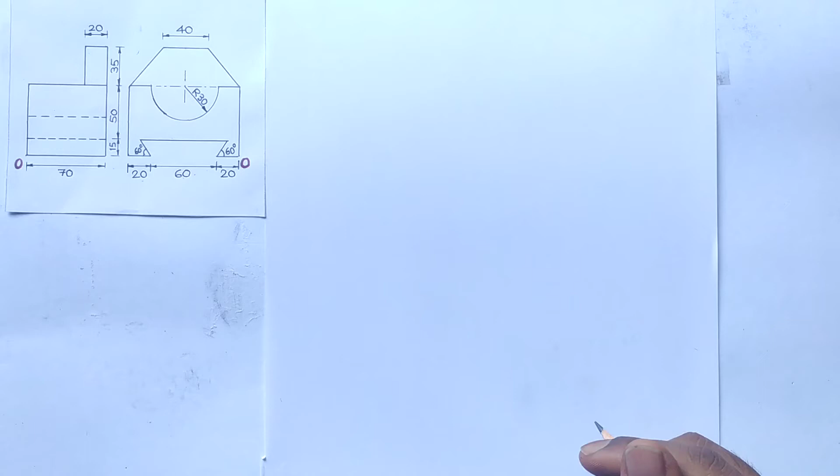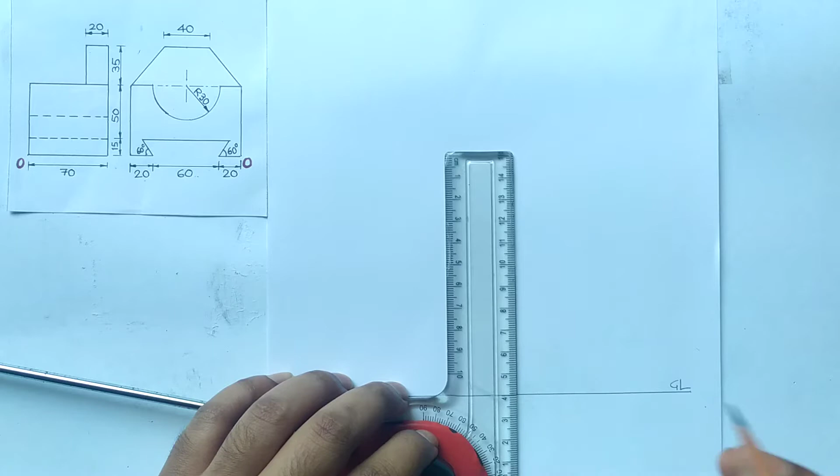To draw isometric for this component, let's draw here the origin line or the ground line. Mark a single point O, draw one vertical line, right, 30-degree incline.

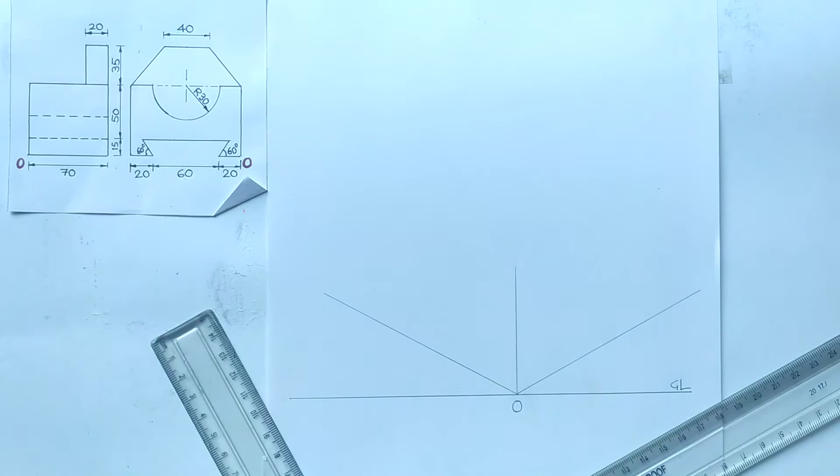These are the reference lines, right? So we will start from these lines only. Okay, these are the reference lines. Now if you observe here it is the location O, right? So that means on the left side, this should be the left side, and this should be, here it is the location O, so this should be the right side.

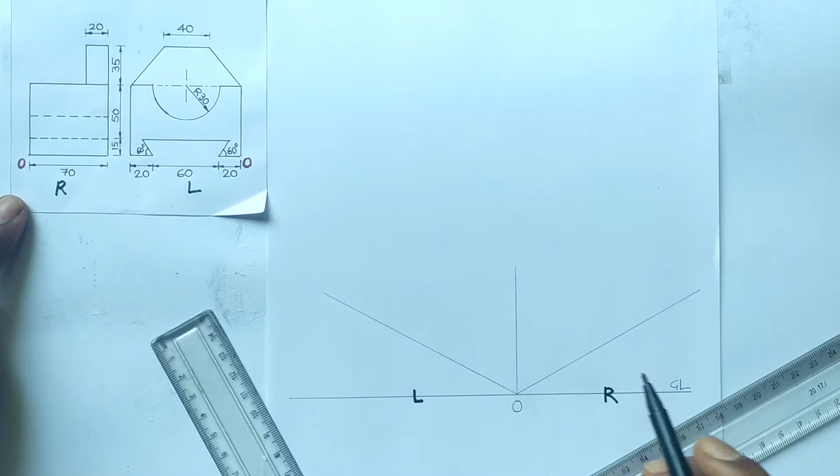So on right side we have to take 70 mm, and on left side we have to take 60 plus 20 plus 20 means 100 mm. So if you observe here, these are the two edges which are only visible, right? So we will draw these two edges only.

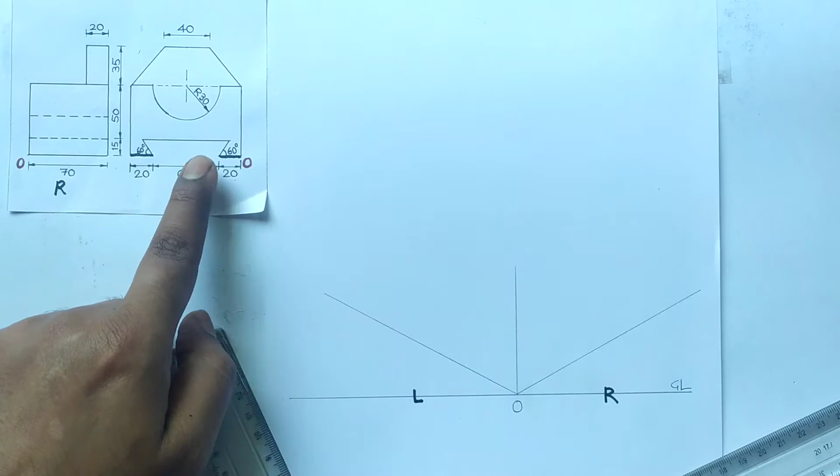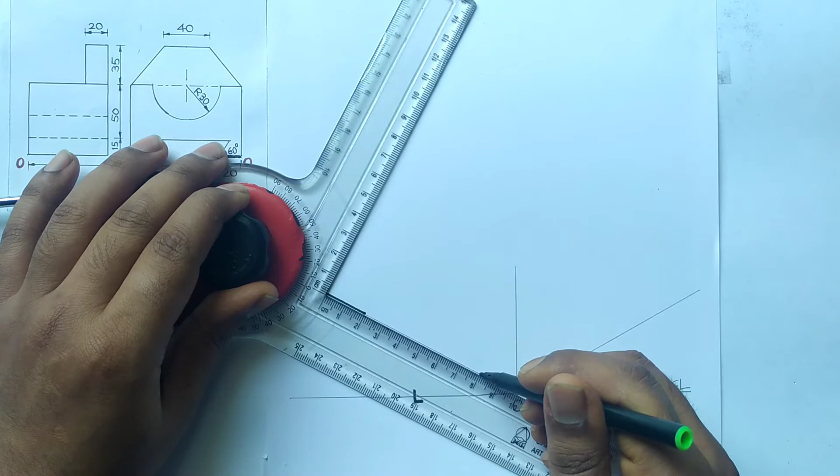See here, 60 mm on the left side. Out of this 100 mm, only 20 mm which is visible, okay, these two edges. Now we will form this slot afterwards. Initially we will draw all these things.

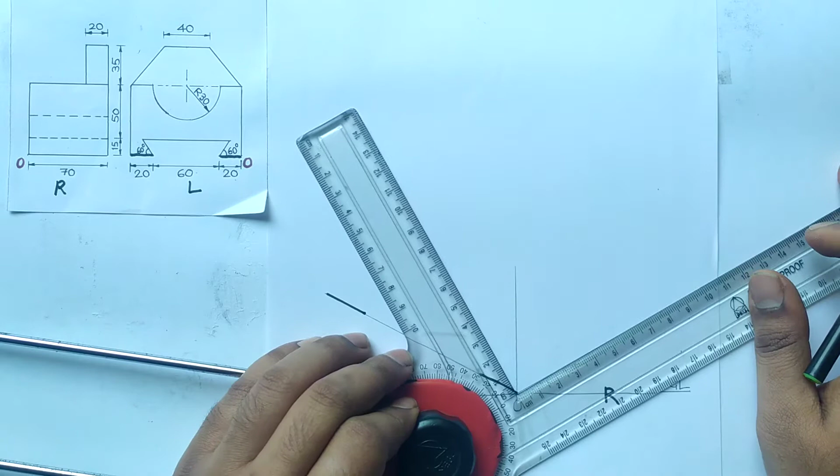Now see here, from O the right hand side is of 70 mm. So draw 70 mm from this point. 70, 100. Now see, vertically it is of, this vertical edge is of 50 plus 15, that means 65.

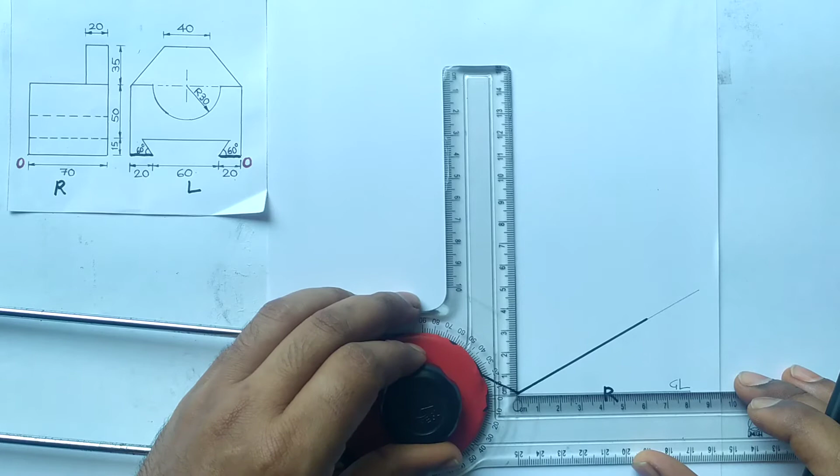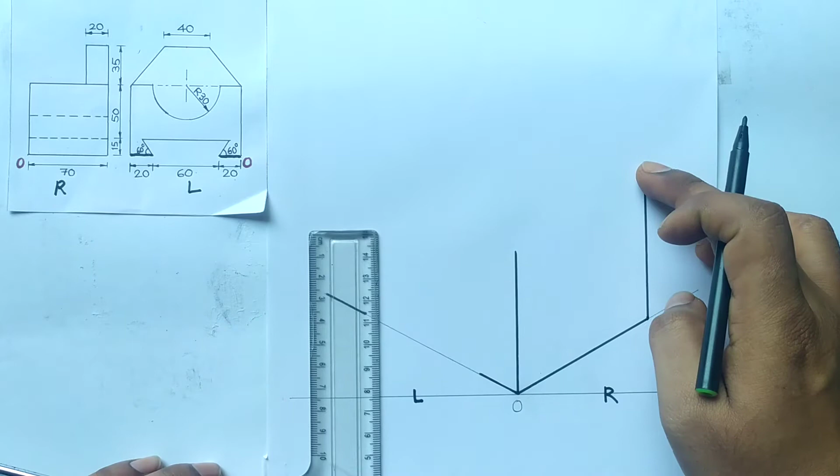Okay, so draw here 65 mm, right, this much 65. Okay, so I will draw these lines from this corner also, 65. Okay, now at this corner also 65. These are the three edges which are of 65 mm length.

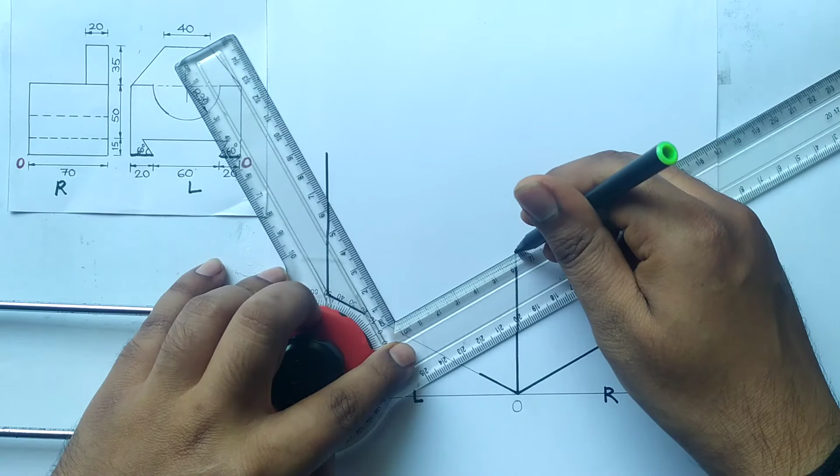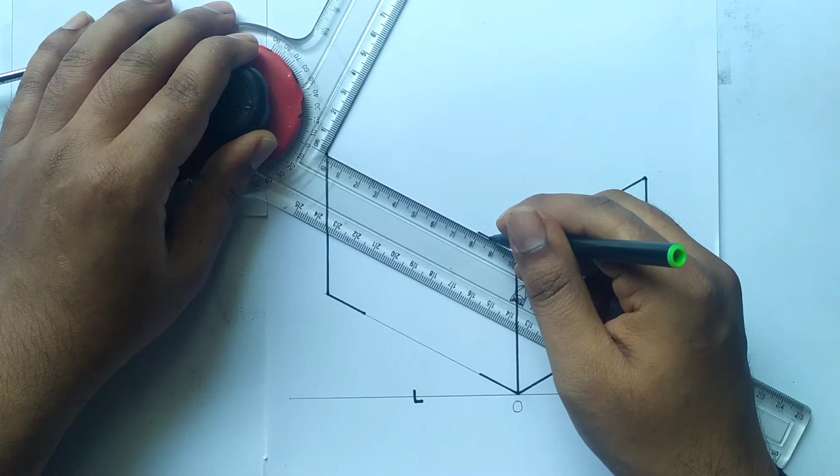Now I will align the drafter to the right side and simply connect this. While connecting this line, left hand side line, since the radius is of 30 mm, that means this portion is of 60 mm. So by leaving 60 mm centrally, I will connect only the end parts which is of 20 mm. That much portion is there.

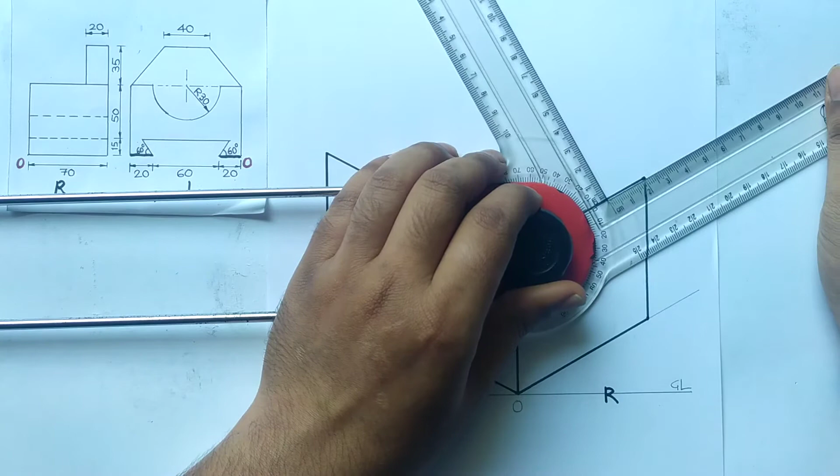Now as we know, this distance is of 35 and width is of 20. Since this line is parallel to R, I will take here 20 mm distance. Here it is. This much distance is of 20 mm, right? So what we have to do, we need to align drafter to the left side.

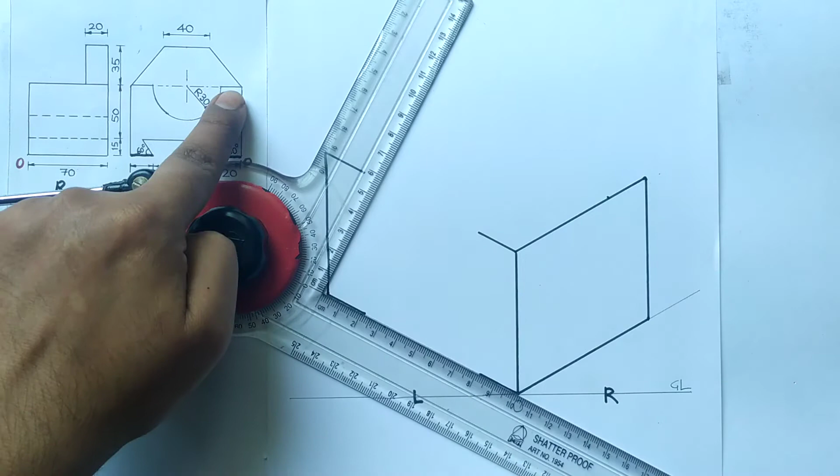And now this total distance is of 100 mm, this is of 40, that means remaining is of 60. Now 60 we need to divide equally on both the sides, that means I need to draw this line, right, this.

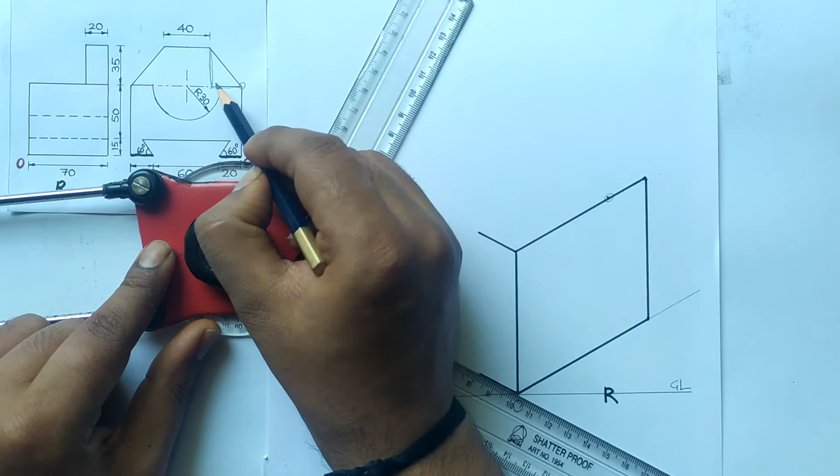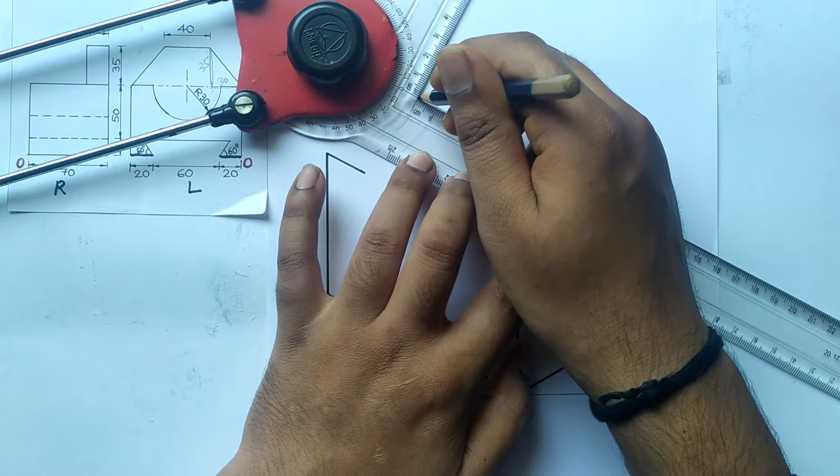Since I got this point over here, this much distance is of 30 mm and vertical distance is of 35, right? So I will draw it over here. Total distance is of 100 mm, out of which 30 mm, and here it is 30 mm, right? I have drawn two lines of 30 mm.

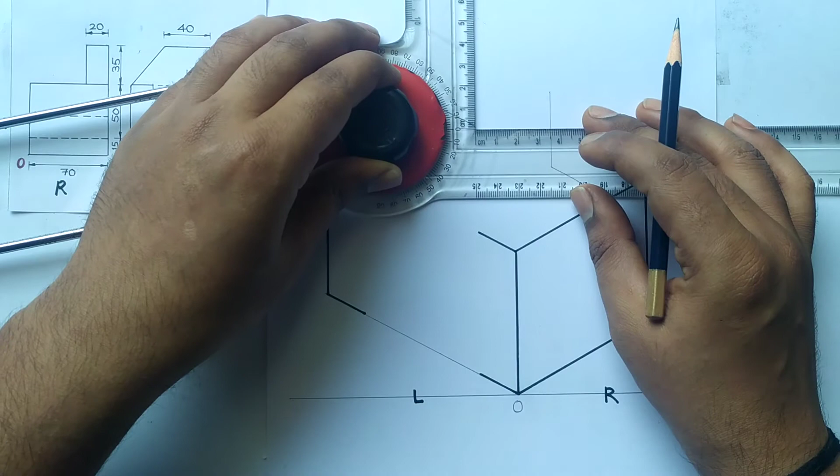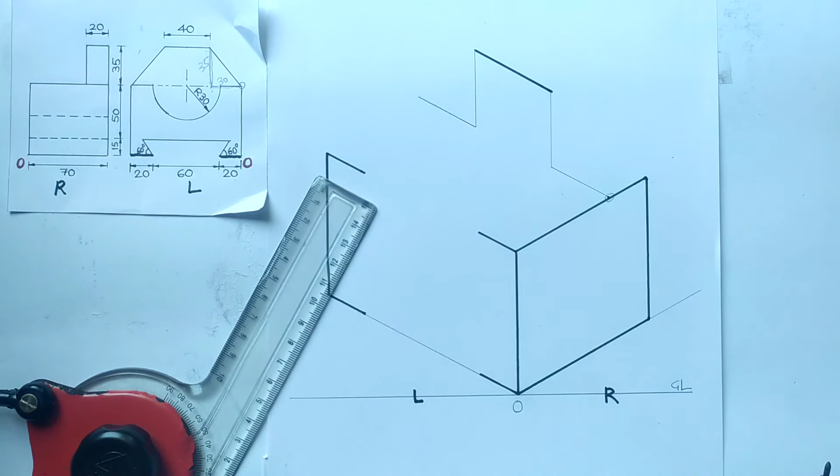Now vertically 35 mm. So align drafter in this way and take the vertical distance 35 mm. Okay, now if I connect this, it should be an edge. Which edge? This edge, 40 mm edge. This should be a 40 mm edge, which I have to connect to this point, and this point.

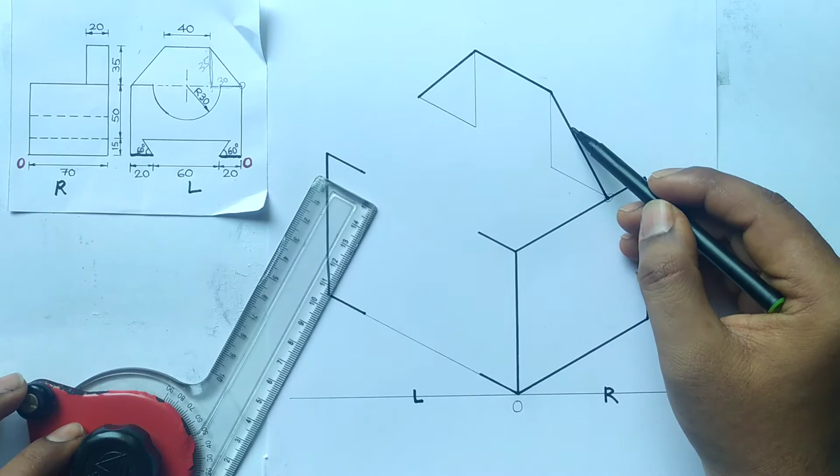Right? This is the foremost, means the first edge. Now similarly I have to generate these two lines which are parallel to this and this from these points, right? So for that, align drafter in this way.

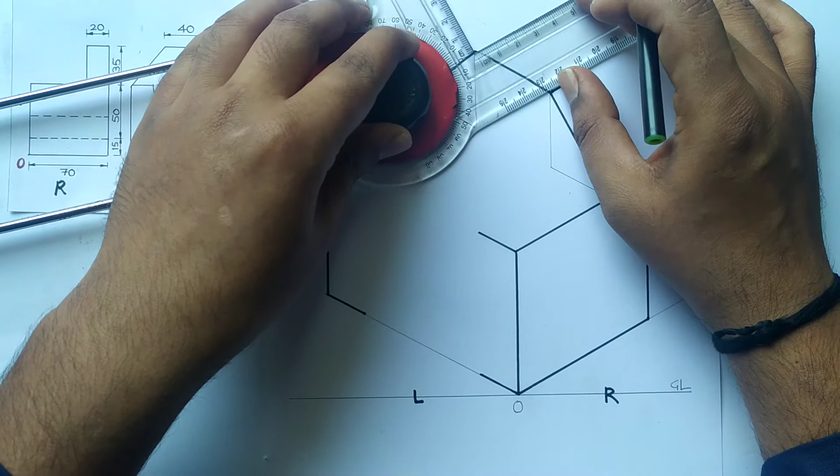To the right side. Since the width I know, which is 20 mm, I will draw 20 mm from these corners. Now it is easy to connect. Right? This much portion is there.

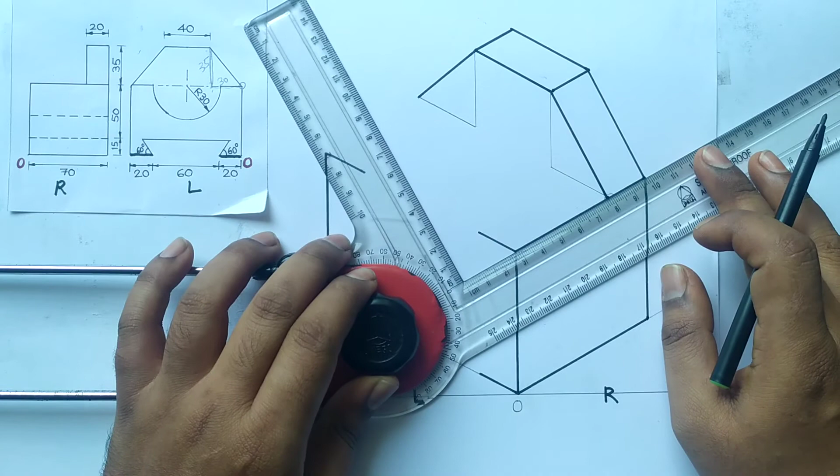Now, since here there will be a curve, right? So to draw this curve, I need to form here the edges, right? So at the same time, we will finish up to this edge.

Right? After drawing this edge can be visible.

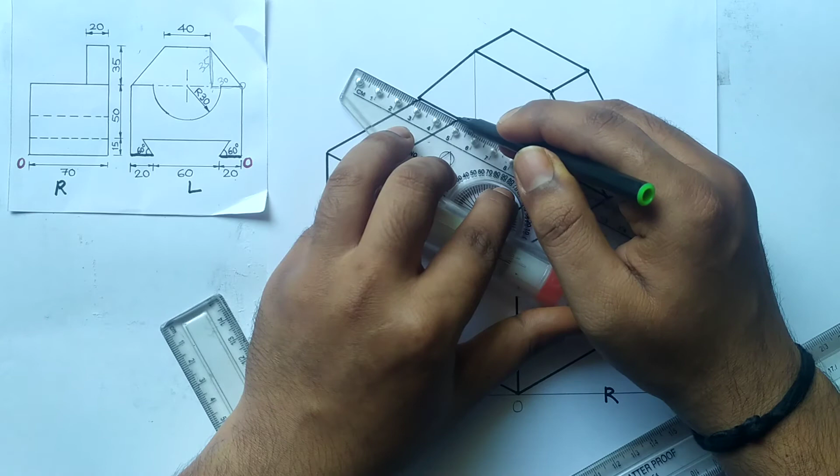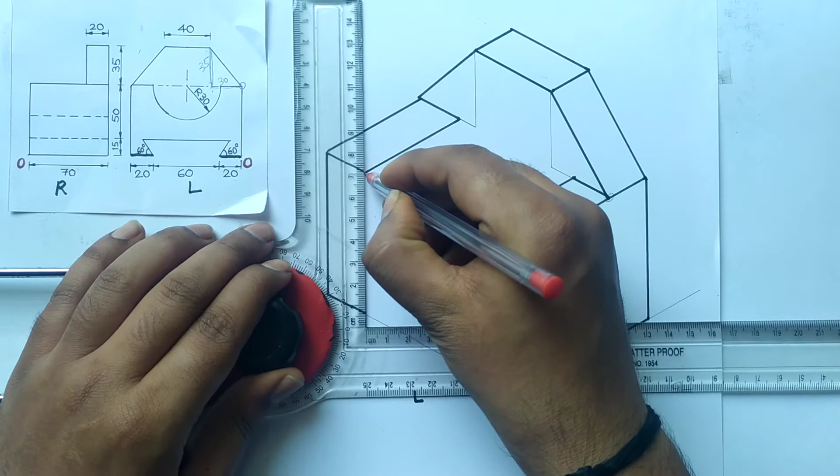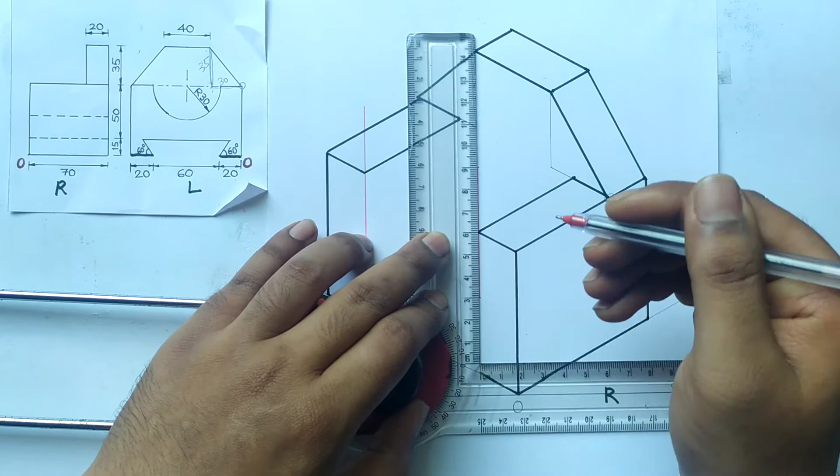Now I need to generate here a half circle, and for that we will form a square. Since I know, I will align drafter initially vertically. From this point I have to take 30 mm distance on both sides, because radius is of 30 mm. So 30 mm on both sides. The same way over here, 30 mm on both the side.

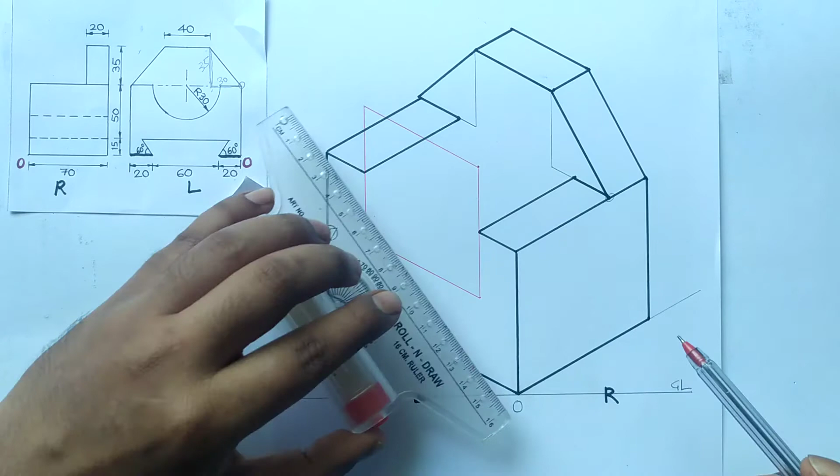Connect it. Now this will be the square by which we will get the inside half circle. So for that, connect the longest diagonal. This is the longest diagonal. Now from this point connect to this one, right? From this point connect to this one, or from this point connect to center point.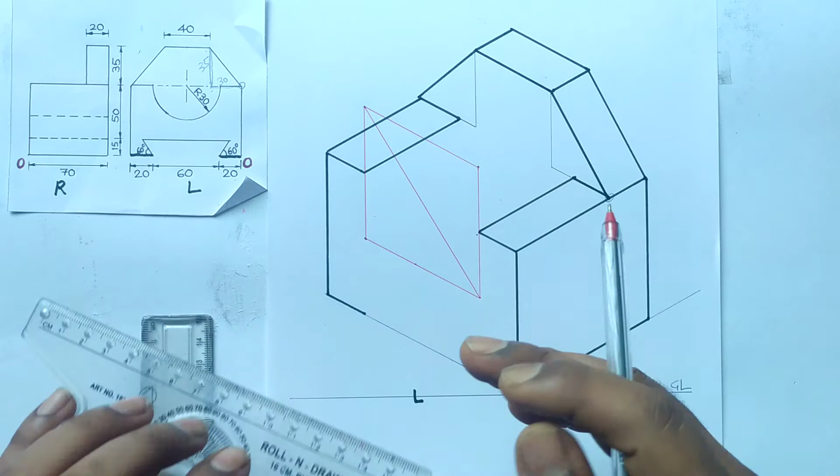See carefully. From this corner I have connected to the center point. This is the center point. From this point I need to connect to this center point. Right? Now,

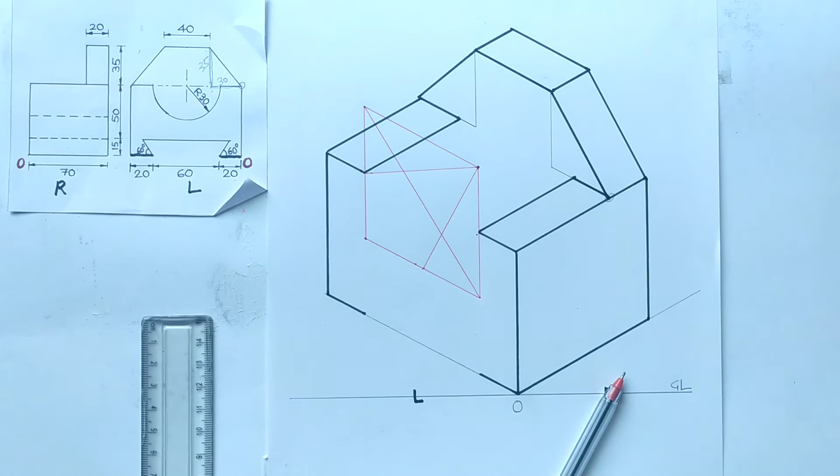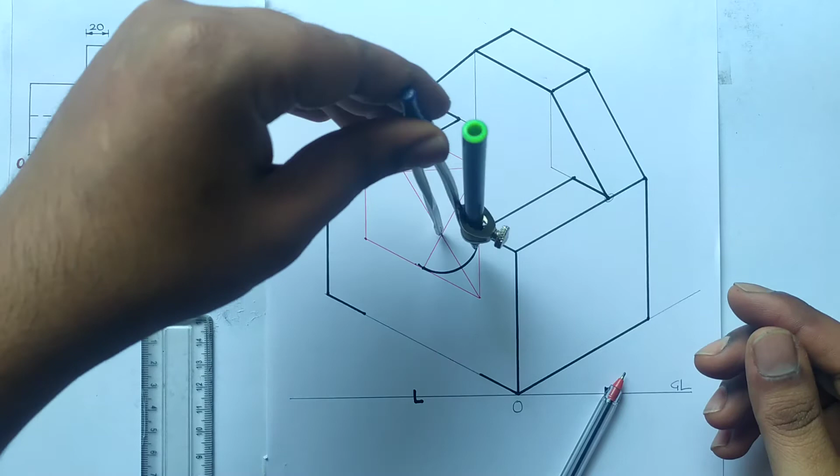By taking this as a center point and this much distance as a radius, I need to mark an arc. So let me check. Okay. This one is the first arc, smallest arc, which will cross the longest diagonal.

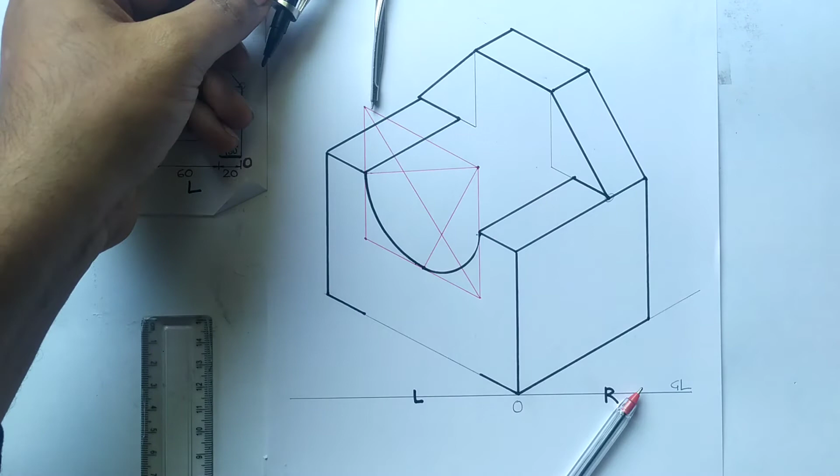Now take this as a center point, and by taking this as a distance or radius, mark an arc. Okay, I will keep this distance as it is. Now by taking this as a center, I have formed this curve. Since this distance is of 50 mm, how? This total distance is of 70 mm, minus 20, which comes to 50 mm.

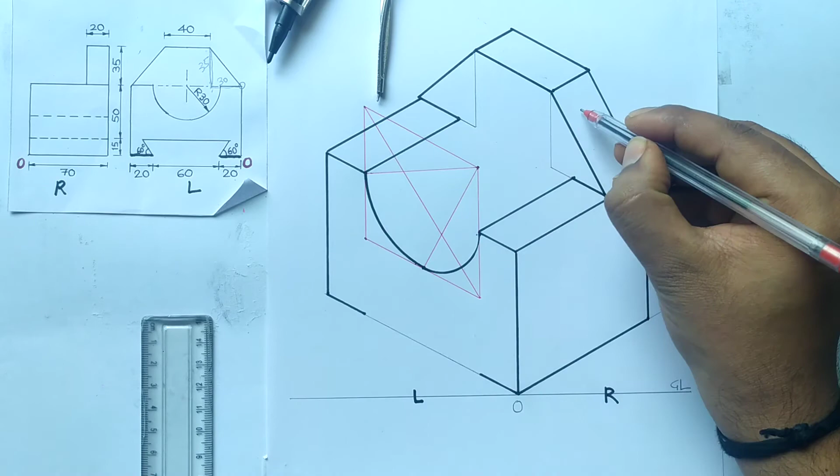So since this distance is of 50 mm, I need to project this point in the direction of R 50 mm. So for that I will align drafter, and from this point I have to project this point 50 mm. I need to project this point 50 mm.

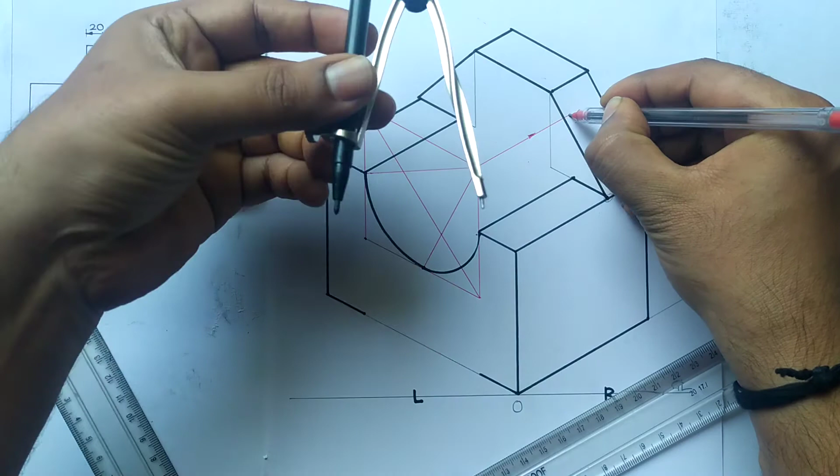So this will be the center. By taking this same distance which we have taken already, this much distance, place it over here, and from this point mark an arc.

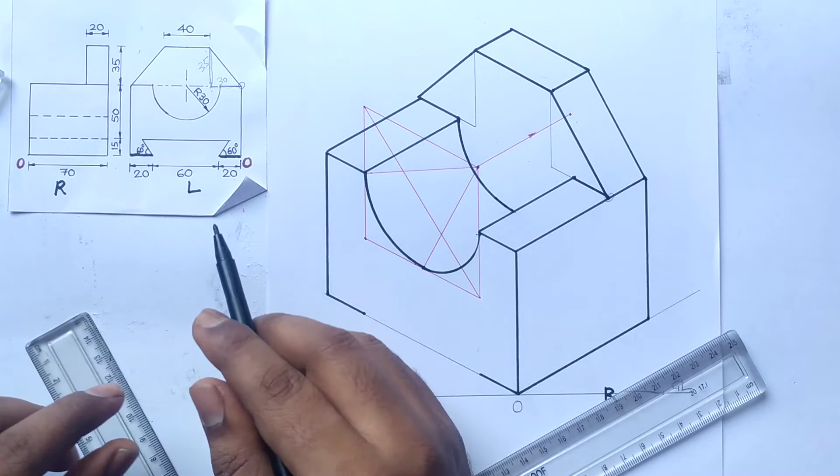Okay. Now the next part, since here we don't know the distances, we need to find this much distance, right? Because wherever angular dimensions are there, to draw in isometric we need to convert these angular dimensions into linear.

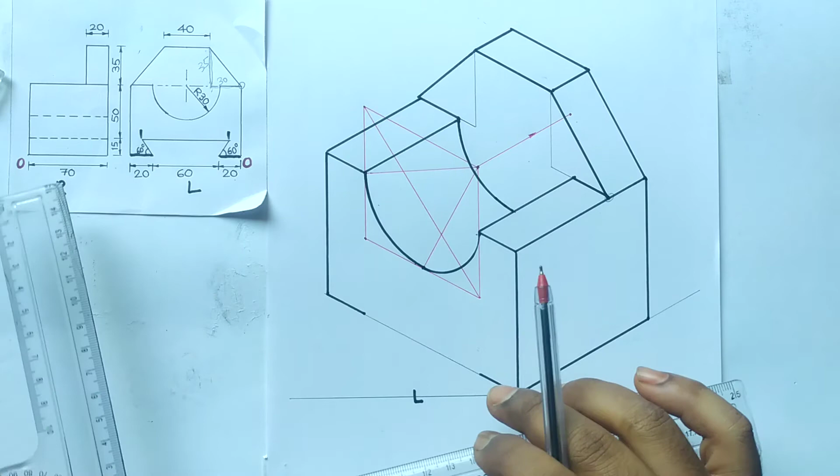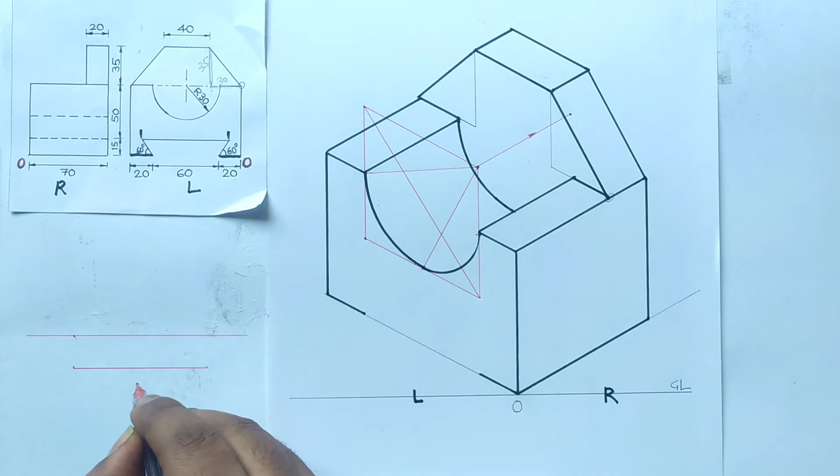See, since I know this distance is of 60 mm, I need to form over here 60 mm, draw separately 60 mm distance, right? The vertical distance of this much is of 15 mm, so take the 15 mm distance vertically. Now since I formed two edges, this one is of 60 mm and this is of 15 mm,

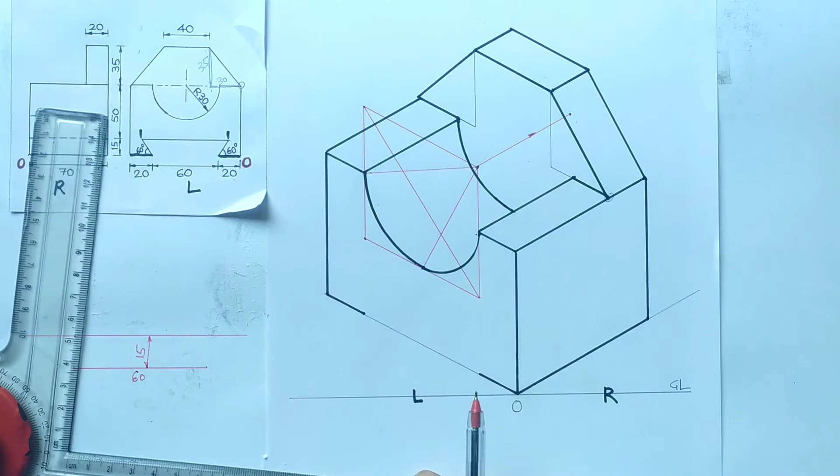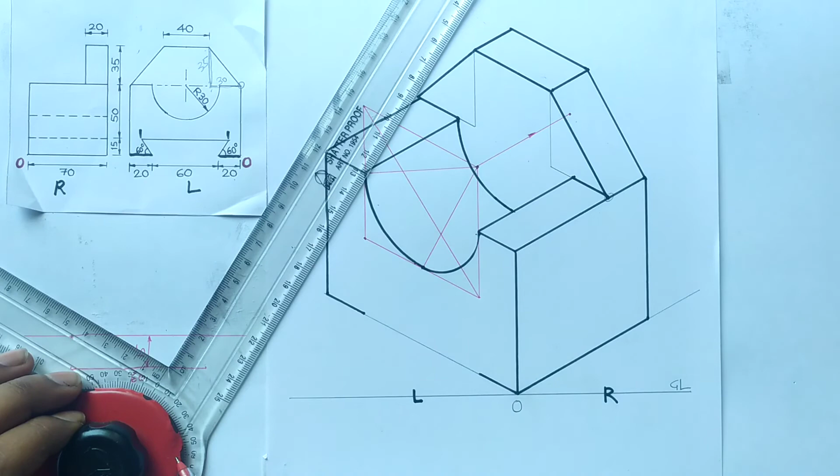Right? So from this point I need to form an angle which is of 60 degree, right? So I will form here 60 degree angle. If I align this to 30, then this angle will be of 30 degree. If I align this to 60, see carefully, if I align this to 60, this angle is of 60 mm, 60 degree. Now this angle is of 60 degree, right? Similarly, you can draw on the other side, in this way.

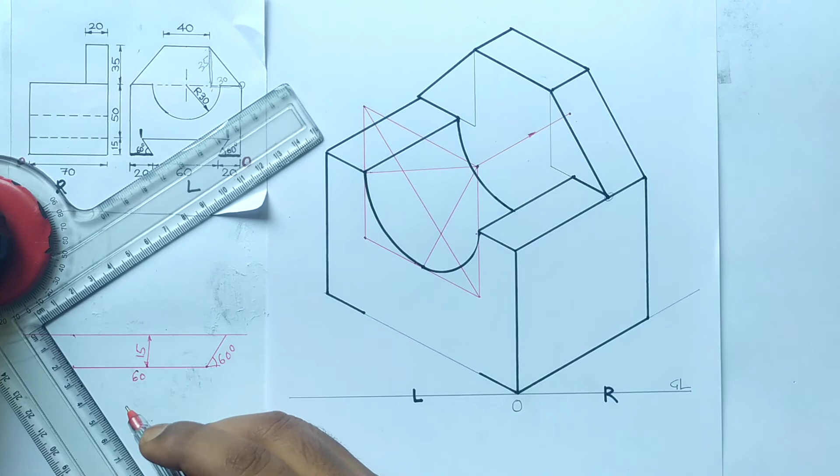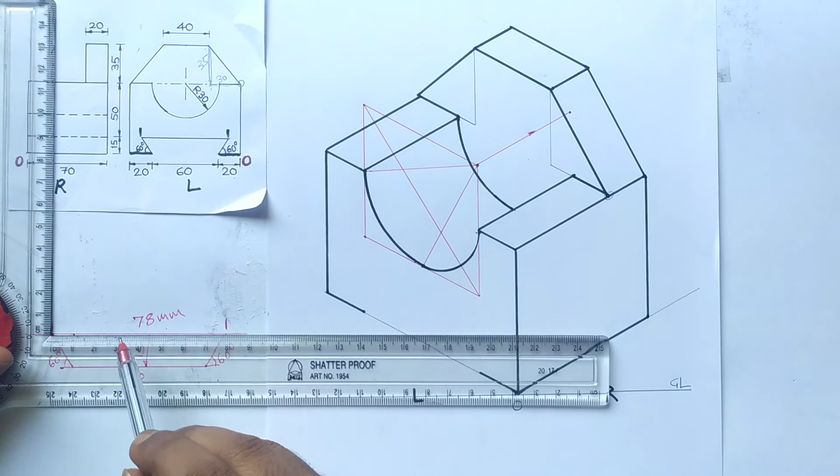Now what I have to do, I need to measure this much distance, right? So currently this distance appears as 78 mm, right? Now this 78 mm, see carefully, if I find the center point of this 60 mm and if I project it, it will appear over here, right? So 78 mm we need to divide into two equal parts, so you will get the distance 39 mm on both sides, 39 mm.

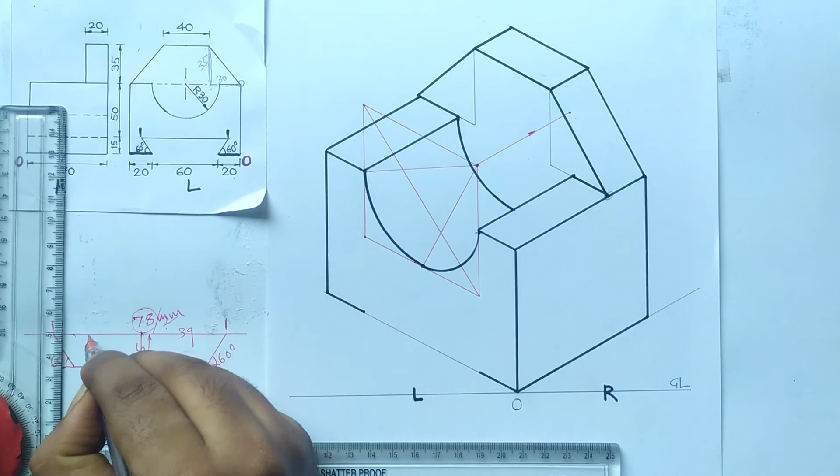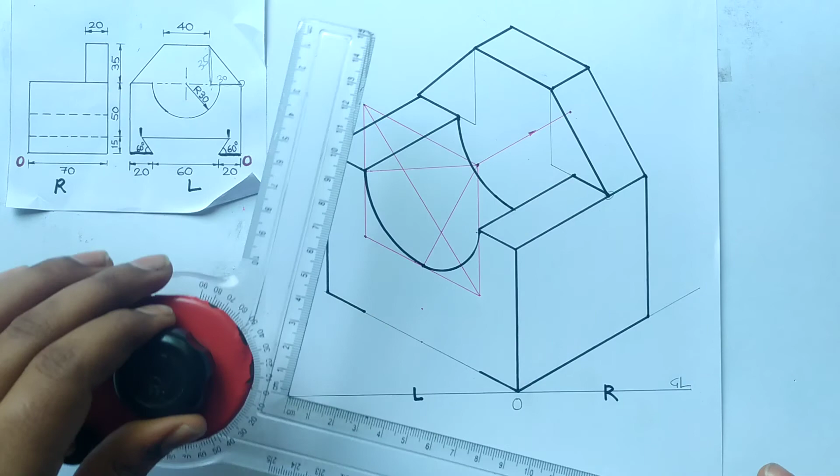Okay, so for that align drafter this way, find the center point, project the center point 15 mm above, 15 mm above. Now from that point I need to draw a line which is parallel to the left side. Now on that line take 39 mm distance, here it is 39 and this one as 39.

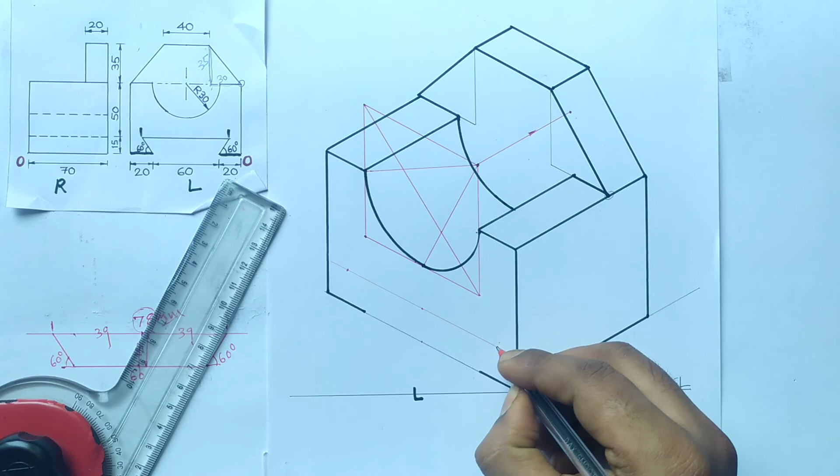So since I got the edges, simply I need to connect these edges in this way.

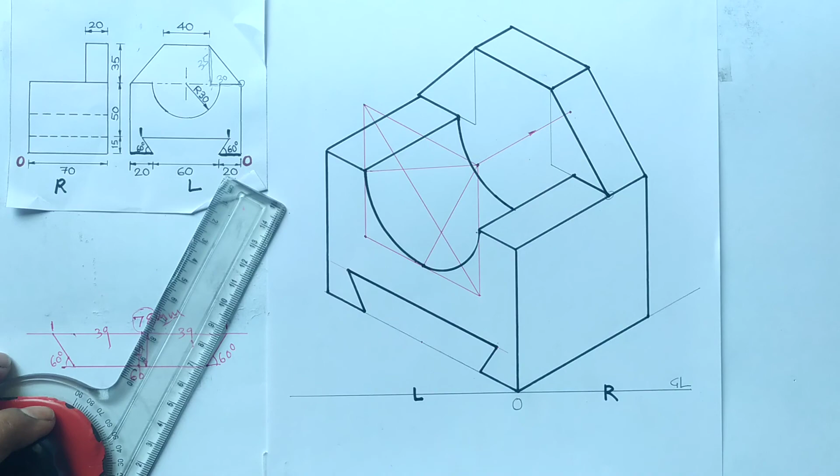Right? Now we need to check the inside edges. How? Simply align drafter to the right side and check whether the edges are visible. Since this edge is inside of this block, but this edge we can easily show. Right? Thank you very much.